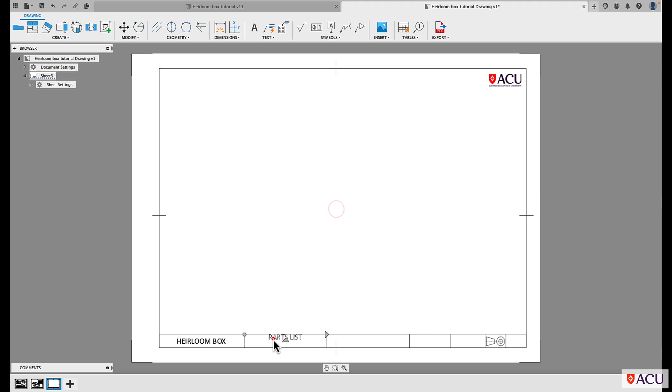Now you'll see that it hasn't carried across any of the text that we had on sheet 1, but we can just simply use the copy and paste function to bring across information that we need. So if we go back to sheet 1, copy, paste. Now of course in here we need to use our text function to put in parts list, and just make sure that your caps lock is on, and then we can align this by eye. I'll go ahead and bring everything else in.

Now, if you look on YouTube, you can actually find all these videos that show you how you can create an automated parts list. I'm not going to do that in this context because it doesn't really give us the information that we require. The second reason why I don't like doing it that way, this is actually a really good way of checking to make sure that you actually have all of the dimensions that you require back in your working drawing.

So I'll go into tables and I will go custom table. Now at this stage where it lands on the screen doesn't really matter, so I'm just going to put it here. Make sure my caps lock is on and just type parts list. So that will automatically go into the title section. Now the other thing we need to do is make sure that we've got enough rows and columns. So you can see up here there's some functionality that we can use.

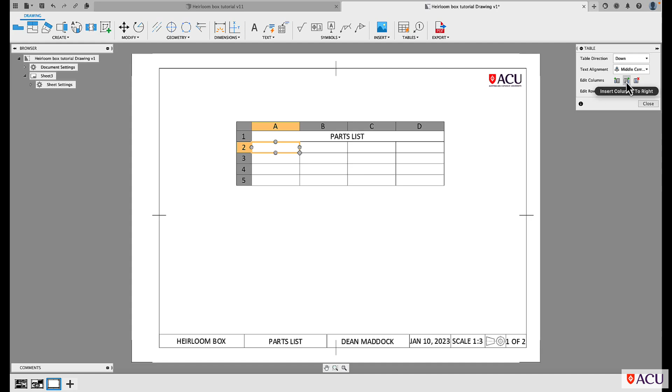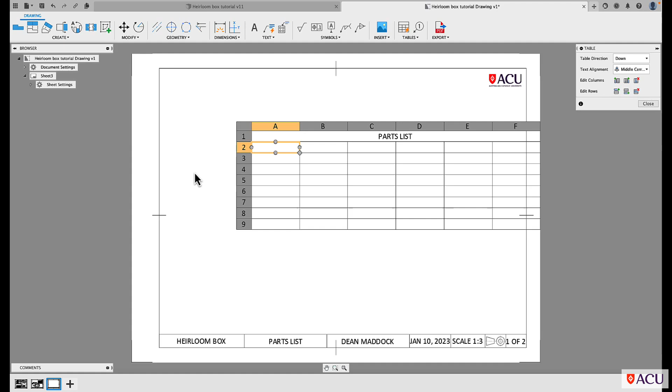So we need to have 6 columns across. At the moment we've got 4. And we need to have 8 down. At the moment we've got 4. That'll give us what we need. I'm just going to click away and then just move it back onto the screen so we can see it. Now we're going to modify the size of this as we go.

So the first thing we want over here is material. So we just single left click to select the cell. Then we'll have number of. Now I shorten that to just a hashtag, because usually we can make that into not such a wide column. Then we have length, and I just go L, W, T, and then what the material is. Okay, so that's our basic parts list.

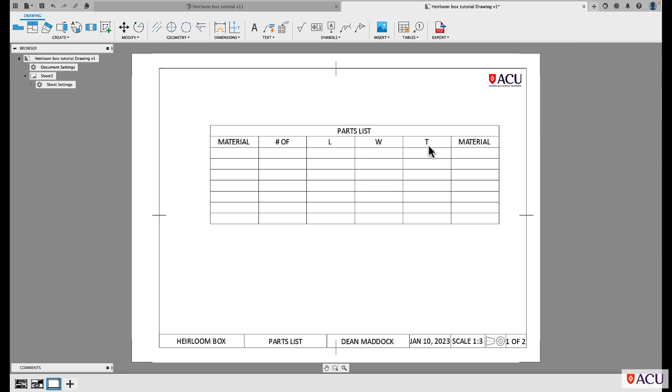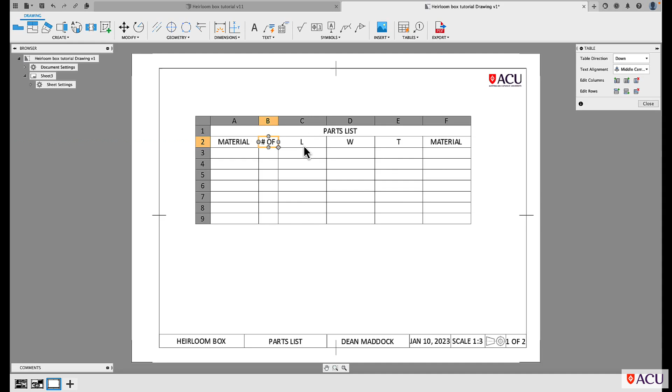Now, these columns here are not going to need to be this wide. So to make it more compact on our screen, we can actually just adjust the width of those, and you can continue to adjust as you go. Now, as far as I'm aware, it doesn't have a function where you can adjust a few at the same time, but you can just do it by eye. And it works fairly well. We might want to make material a little bit bigger. And that was a mistake there. Sorry, item is what I needed. So I can just delete that item.

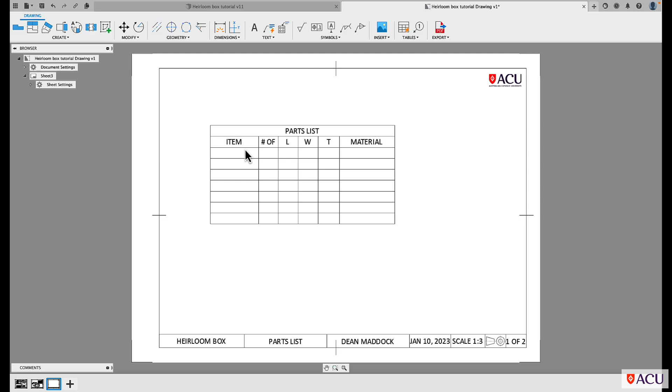Now, if it were a more complicated project, you could have another column over here, which is actually like a part number as well. In this case, there's not really that much confusion in relation to what part is what. But if you were dealing with a very complicated project, you might want to have an item number and then have that annotated out on the drawing somewhere.

Let's go through and think about what we've got. So I've obviously got our side, end, base, divider. I'm going to go ahead now and just populate this, and you can follow along.

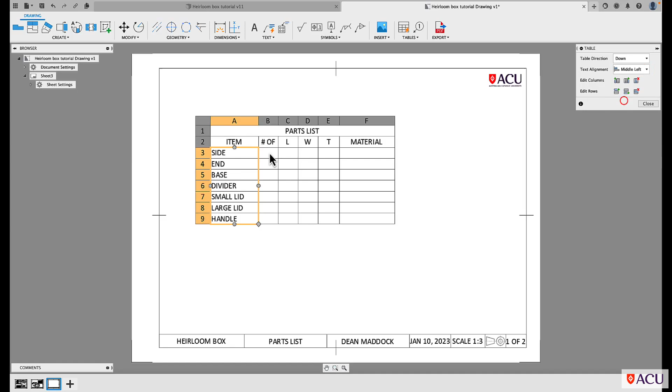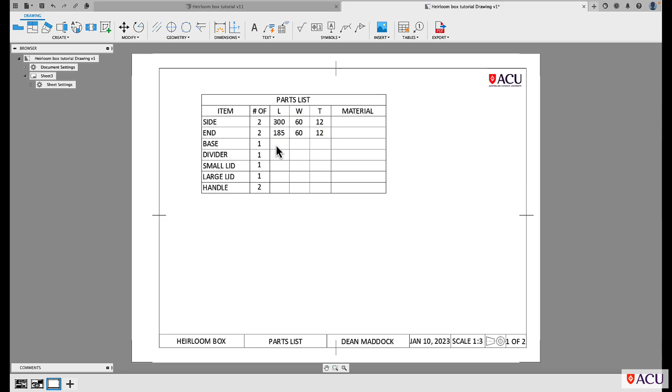Okay, so now as we go through this, what you want to do is just go back and check off your working drawing for the various dimensions. So for example, I've got the base and I need to look very carefully at my working drawing. So the length of the base is down here, 284 by 169.

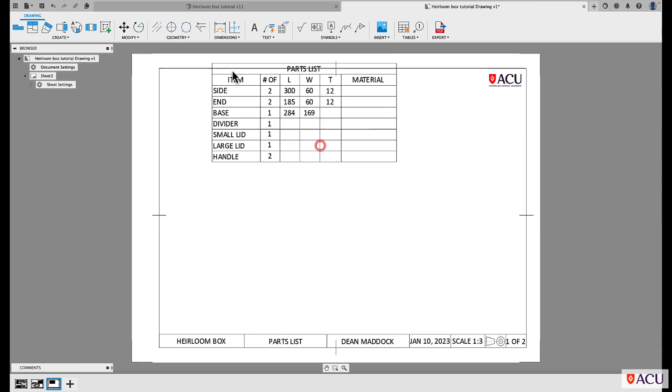Now in the original working drawing, we actually discovered that we did not have a dimension here for the divider, for the width of the divider. It could have been worked out off the working drawing, but it's best practice to make sure that you've got the dimension there. Now what I want to do is just show you if for some reason there is a dimension missed in the working drawing, how you can actually then get it off the product itself.

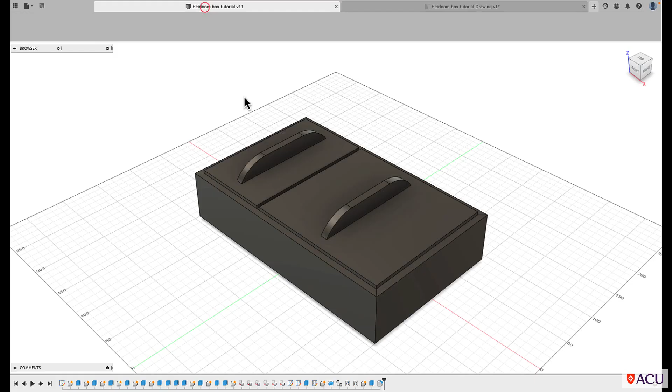Okay, so in here, let's say we don't know the width of the divider. What we might want to do is just hide some pieces so that we can get a good look at the divider. And we'll just hide the lids. So let's say we do not know this dimension here. There's a few different ways we can do it.

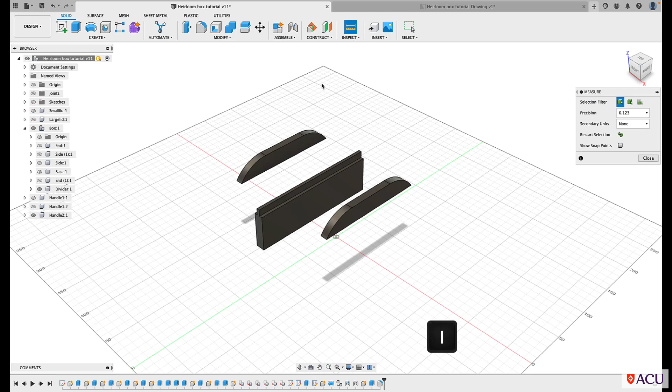One of the quickest and easiest is use the inspect tool. The keyboard shortcut is the letter I. And I'll come in really close so we can see it. And so I basically want to go from here to here, 52 millimeters. You'll see it appear there, and also it appears there and there. So that's one way you can get a dimension.

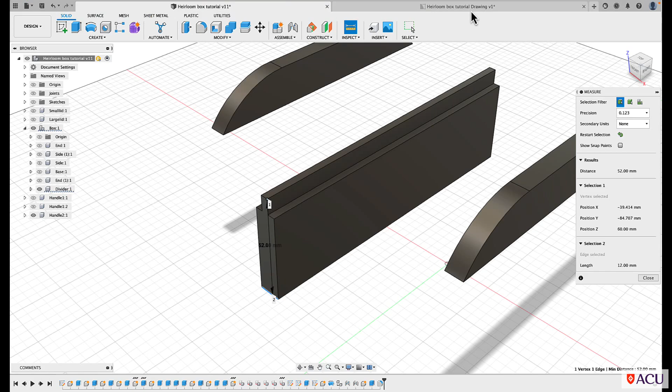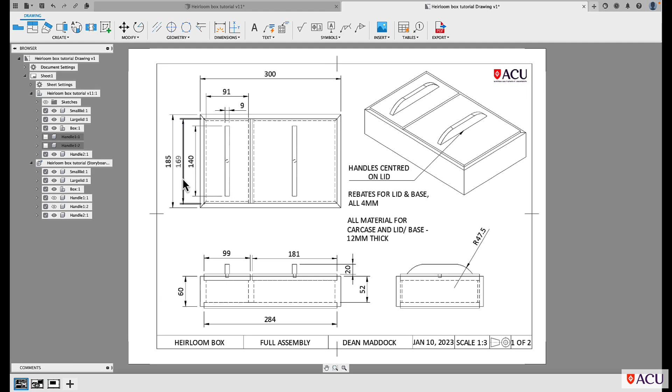Okay, so now that we've got that, we'll just go back to our drawing. You can see I've actually added it in there later because we realized we didn't have it. So, sorry, we need to just get the length of the divider. So the length of the divider goes from there to there, so that's the 169 dimension. Go ahead and finish filling this out.

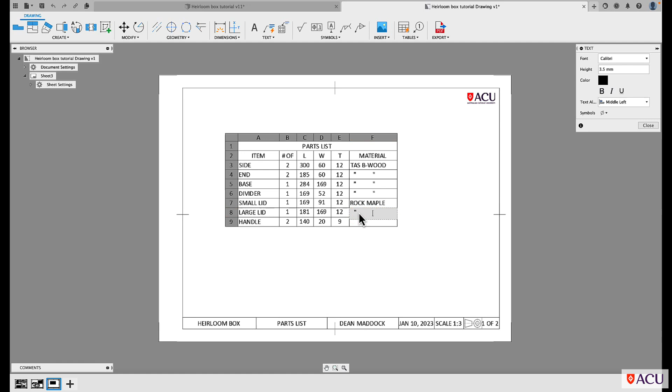Okay, so now we've got our parts list. We can move it sort of off to the side here. And then finally, it can be beneficial to bring in another view of the project just for the sake of further annotations as necessary. And as I discussed before, if you needed to have like a part number, you could have another column here and apply that as well.

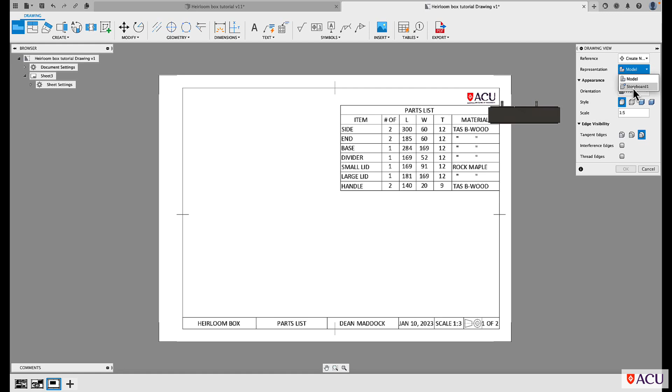So what I'm going to do now is I'm actually going to bring in a base view, and in terms of the representation of it, I actually went and created an exploded view in my animation. I'm not showing you in these tutorials how to do that. It's something you can play around with if you wish. It's actually quite useful. So if I bring that view in, here it is, but before we do that, we've just got to get our scale correct.

So back to 1 to 3, and I can place that down there. And then go OK. So there's an exploded view, so that can actually show some internal detail. And like I said, if you wish to, or felt like it was necessary to have part numbers, they can actually be added up in here.

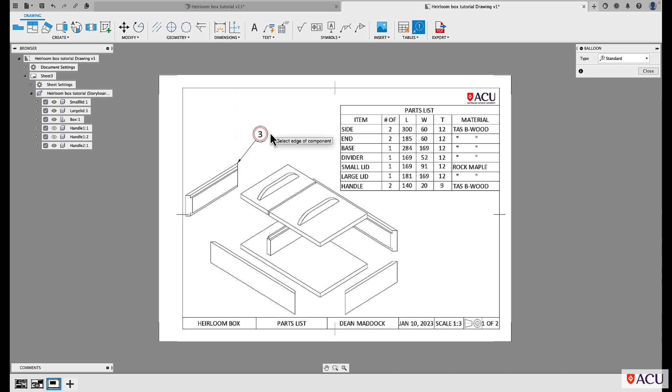So you can go a standard balloon like that, and that's part number 3, which you can edit as well. So just to show you that feature as well, I'm just going to undo that. So the other alternative is you can bring in another view of yours, or you can play around with the animation feature if you wish and bring in an exploded view as well.